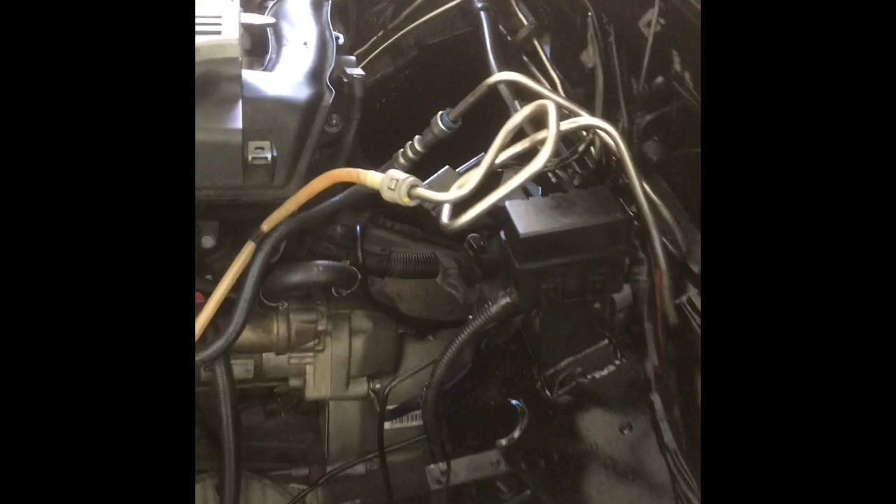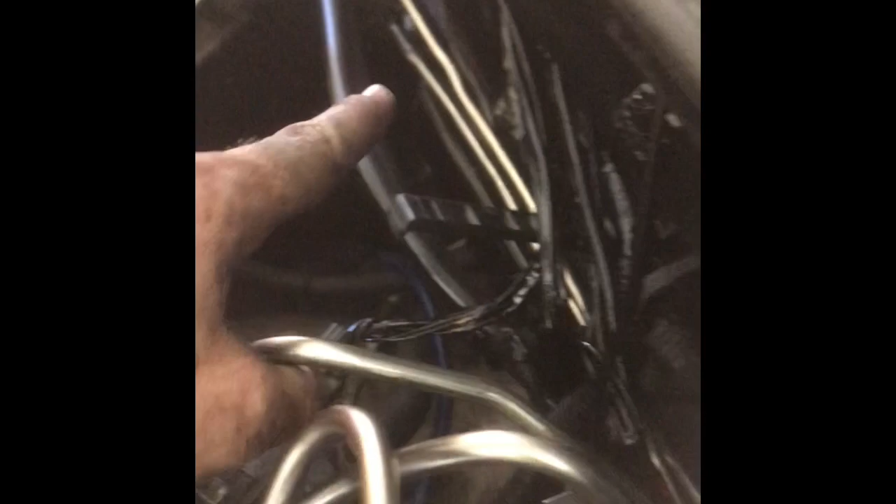So these are just rough at the minute, but use the steel lines just for the cooling capacity on them. Just a couple of lines run over the top, bend them into shape. Obviously you've got to get some hold down clips for them to run across the bulkhead here. Runs down the other side and then underneath the car.

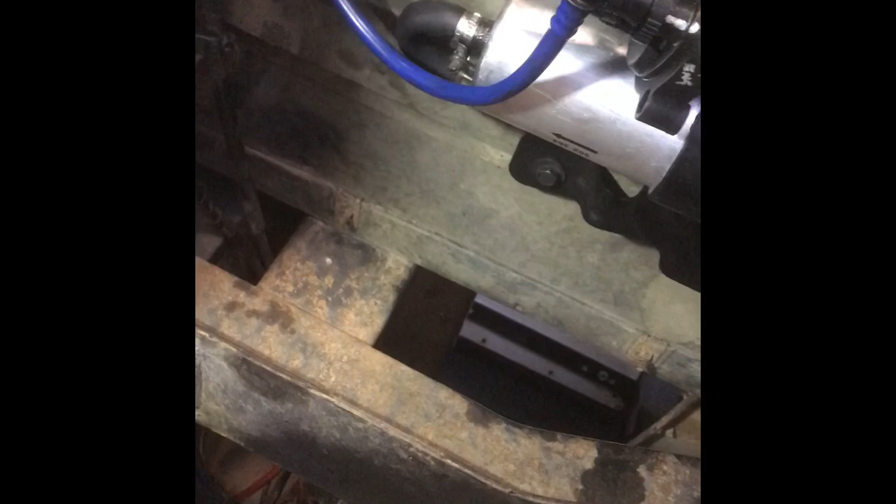Like I said, use the full system. Just welded a bracket to the cross member there, believe it or not. The supply to the engine, I've used all the X5 fuel lines all the way to the top, so that's great.

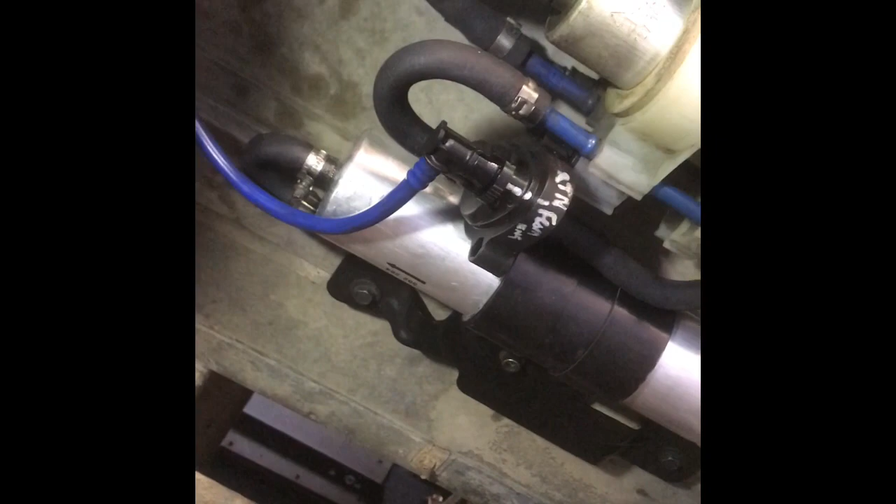The only thing I've got to do is make an extension from the return to the silver line at the front, and then a supply and return from the tank to these two. That comes from the lift pump from the tank, which I'm going to put in the tank later. That is the small lift pump then. So I'm just going to put that in the tank, wire that one up, and then that's it.

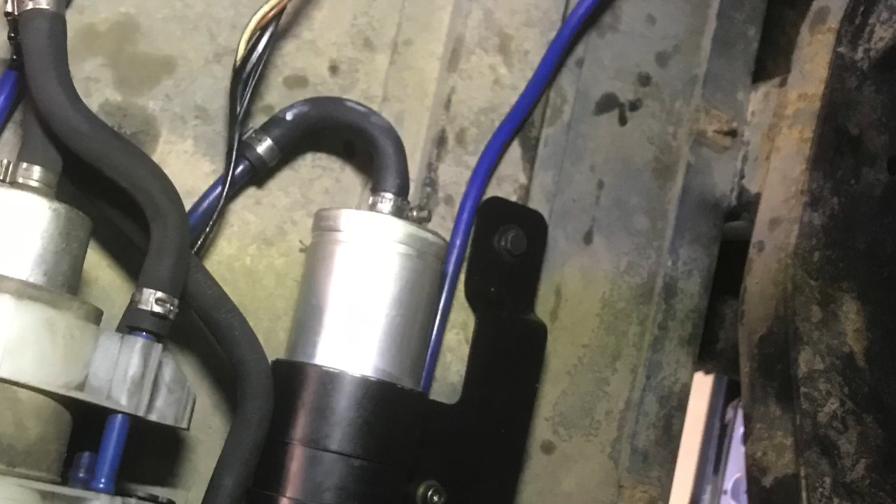The reason why I've mounted it where I've mounted it is because there's a lot going on there. The pump's quite big, I wanted to keep the inline filter as well, so basically I've bolted it up out of the way.

It's in between the chassis rail, sorry, it's up and away from the prop shaft. There's nothing really happening here, nothing going on, so I quite like where it's mounted.

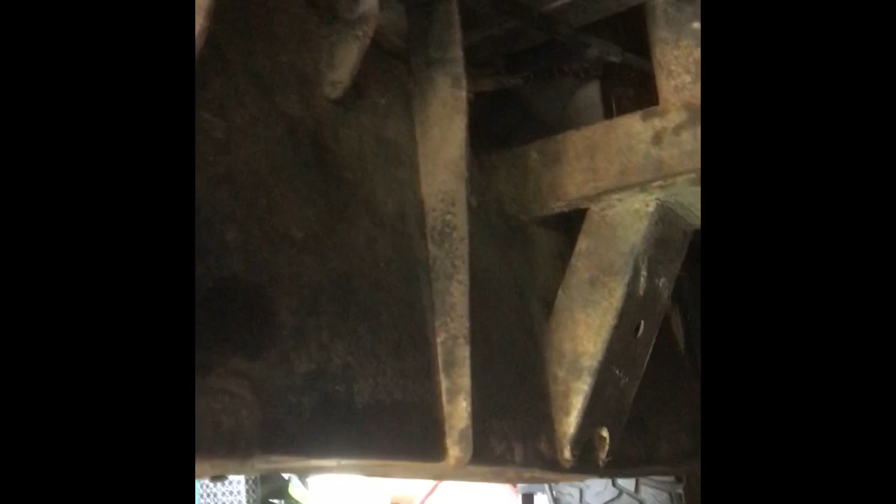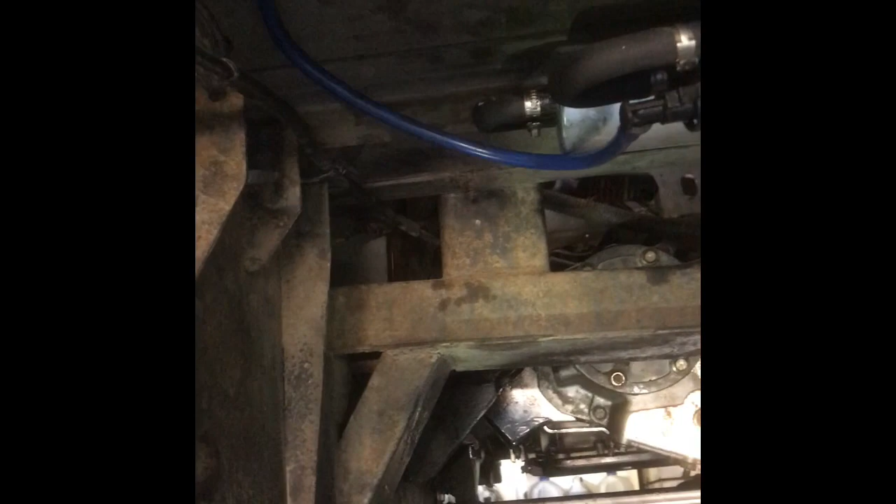I was going to mount it on the sides, but obviously I need the exhaust running up there, and on that side, yeah, it's a little bit tight. On the outside of the chassis rail, don't really want it there because there'll be rocks jumping about. So that's basically why I've mounted it where I've mounted it. Not quite sure where everybody else is putting them, but that was good for me. We'll see if it works or if it doesn't.

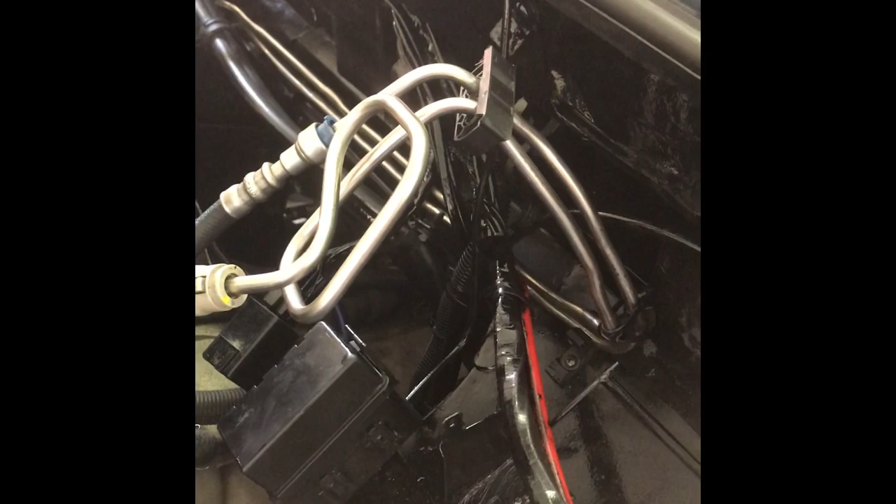Cooler lines, managed to keep them all over the bulkhead, just using all the main clamps which came with it. Screwed one into the bulkhead here, so everything's solid, it's not going to rattle.

These lines all solid across the top. I've had to straighten them all and bend them all different directions, that's why they look a little bit wonky. It wasn't new steel.

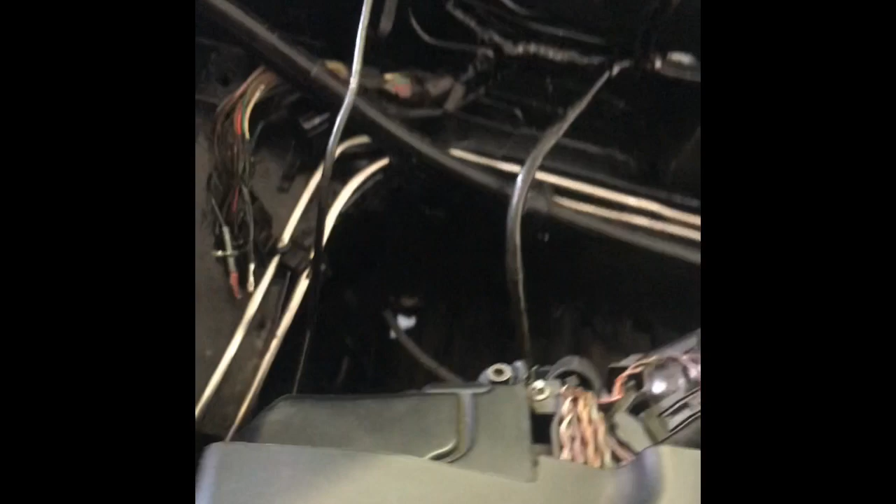Coming around to the other side, same thing again. Just fixed it to the bulkhead, and then run them down underneath, and then basically run them along the chassis.

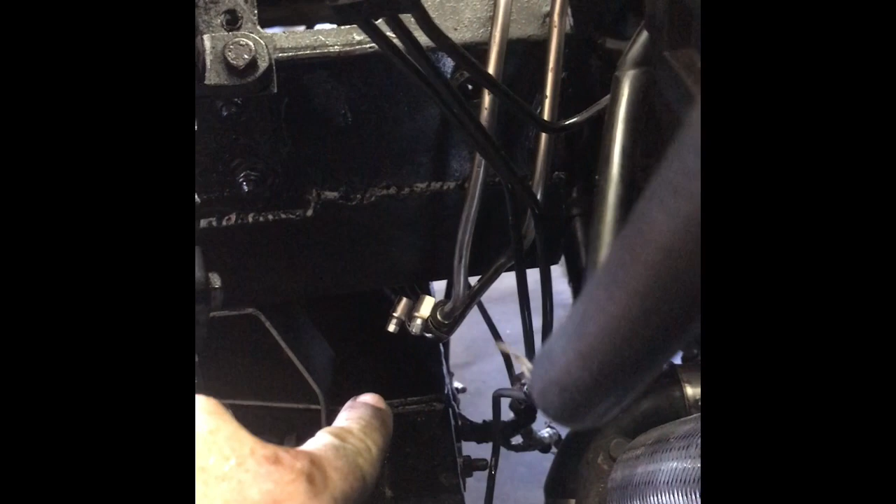I've kept a little bit of the Defender fuel line going down the chassis to the pump. I'll show you underneath.

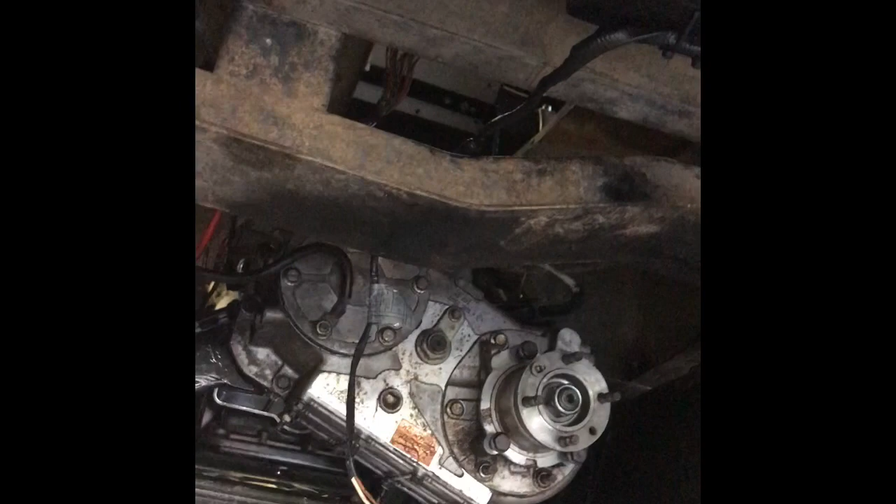So underneath, here we go. You can see that's where the transfer case ends, and that's where the back end hasn't been reconditioned yet, but that's how far up we are.

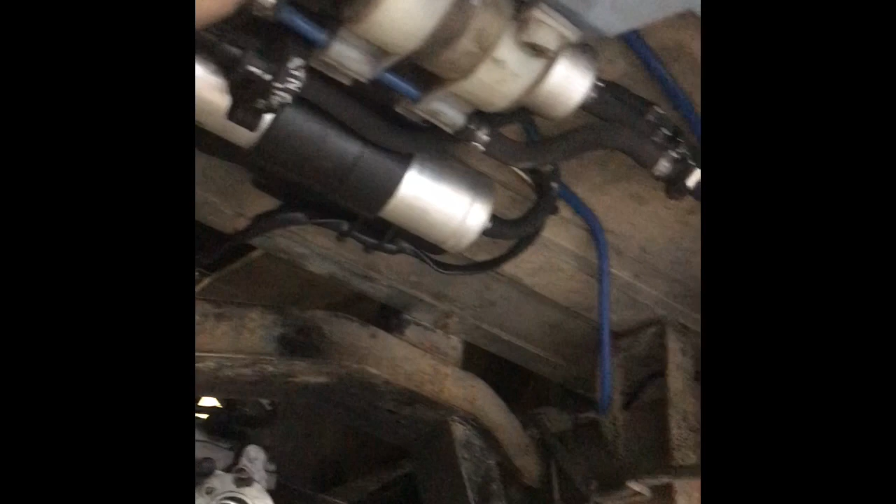Just welded a plate on there, mounted the pump. There's the pump, and then there's the fuel filter, the inline filter, and then all the stock lines then.

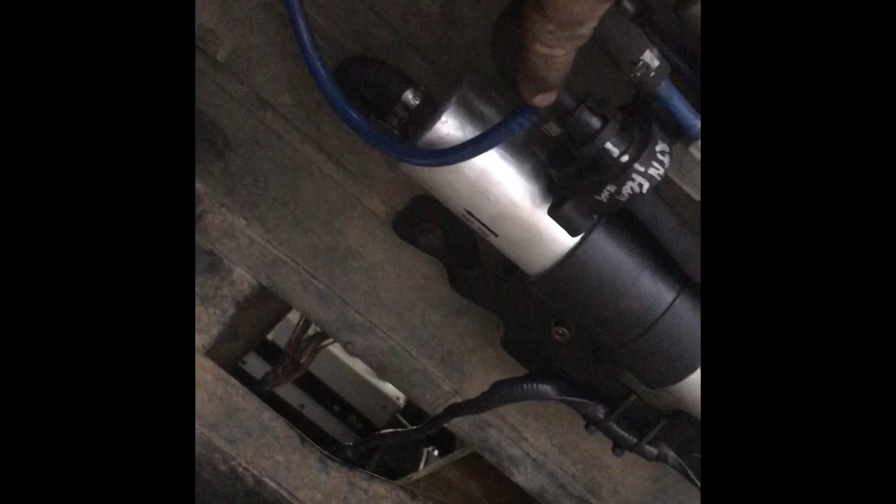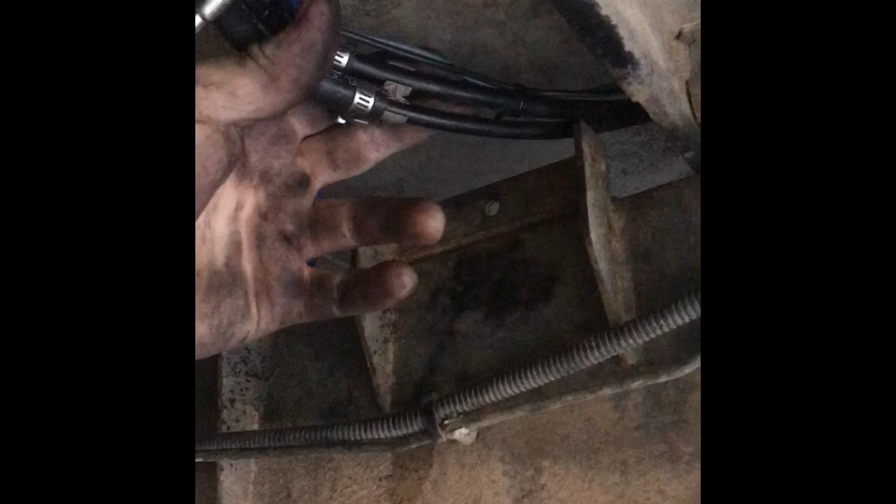So you've got the return from the engine, and then the feed to the engine is up there, that one there, and then run all the fuel lines down the chassis. And then these two lines here, these two plastic lines, they are the Defender lines to the tank, so I just left them in because they were quite neat.

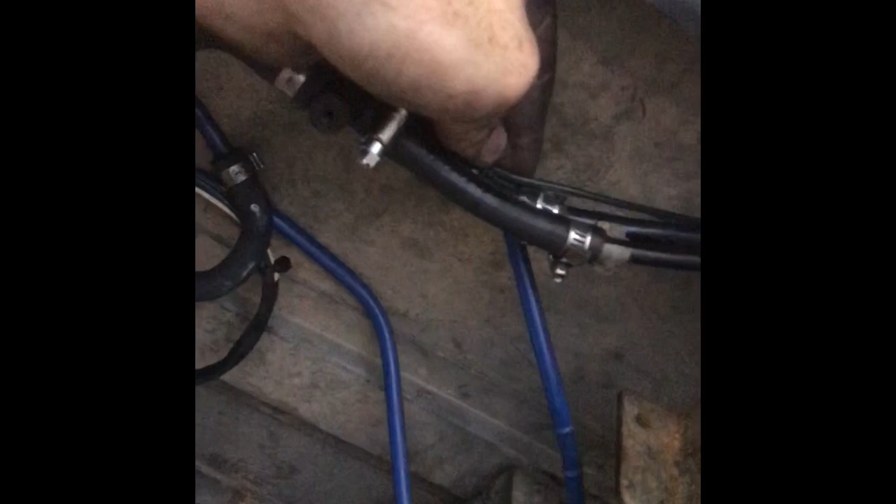And then I've put my own pump in the tank, which I'll add the video in a minute. I put the pump in the tank, and then these are the two wires coming from the tank. So I've basically followed the fuel lines down, and then there's the wiring loom to the high pressure pump.

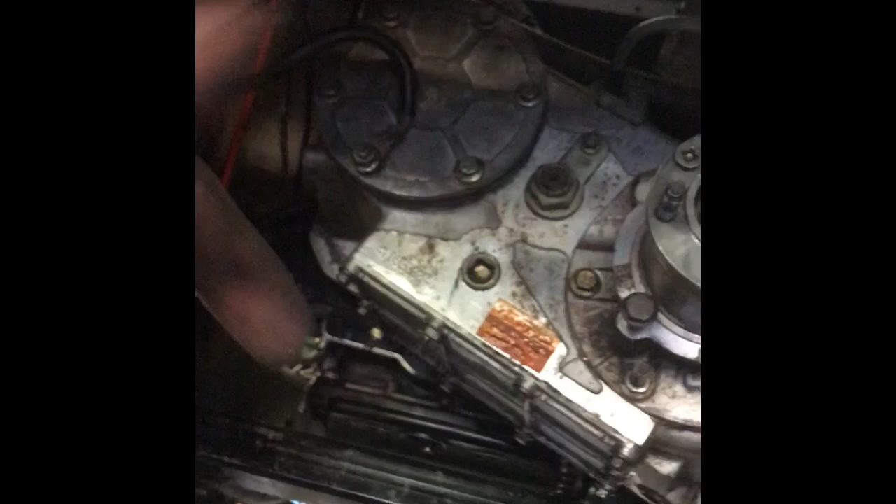That's the Facet pump there, and the wires run all the way down to the main plug, and then this will come off your relay. So you'll have an ECU signal in the relay, and the relay will feed the pump. With two pumps, I've teed into this line, so about halfway down here I've soldered in the second pump wire. The wires are really thick, so there's no problem, it'll hold the amperage of both pumps easy.

Yeah, that's about it with the fuel system. I can show you it working, but I don't know if you're going to hear it. Basically, where are we? No, I'm not going to be able to do it.

When you first start it, that'll probably prime, and then switch off until you start the car, and then the pump starts up again. That's pretty much it. Quite neat and tidy up there, way out of the way of any prop shaft - there's the bottom of the chassis, and then you keep looking up, and there it is, tucked away nice and tidy. Happy days.

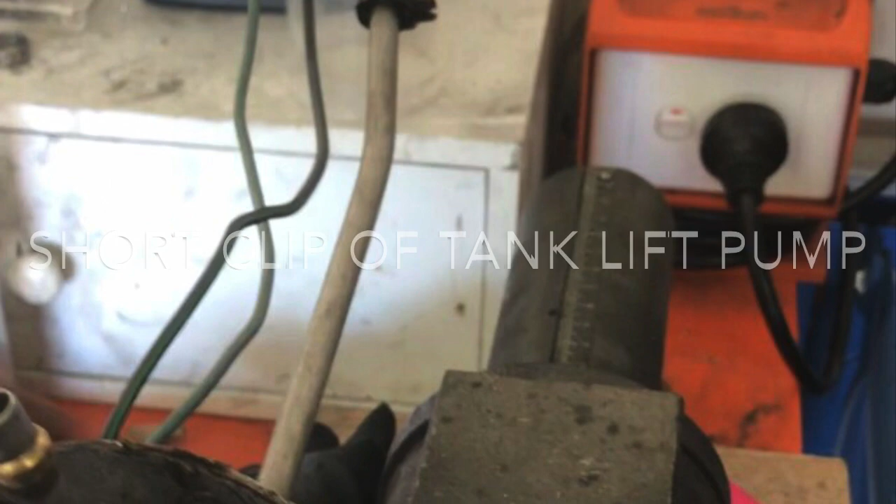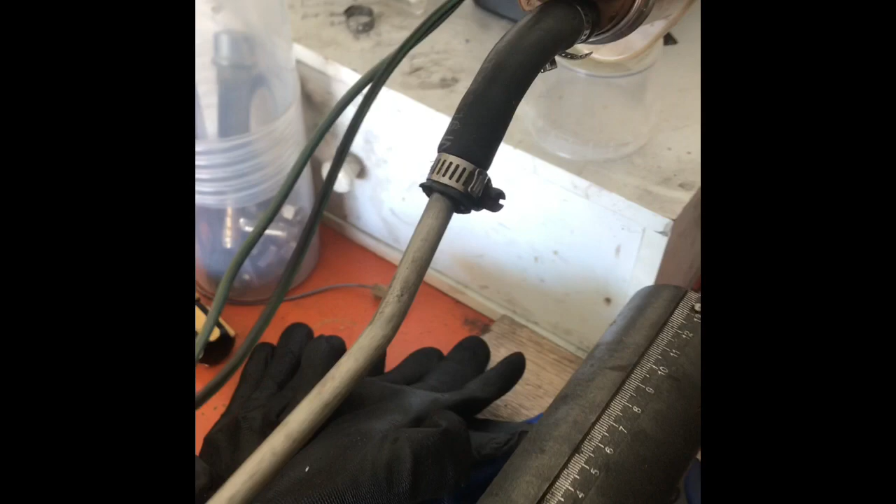Just a quick one on the lift pump up to the fuel tank. Basically taking off the Land Rover delivery top for the pipe, taking off the Land Rover part, which is just a strainer on the bottom, and then attaching the BMW lift pump, running two wires through a fuel resistant grommet, just run the two wires straight through it.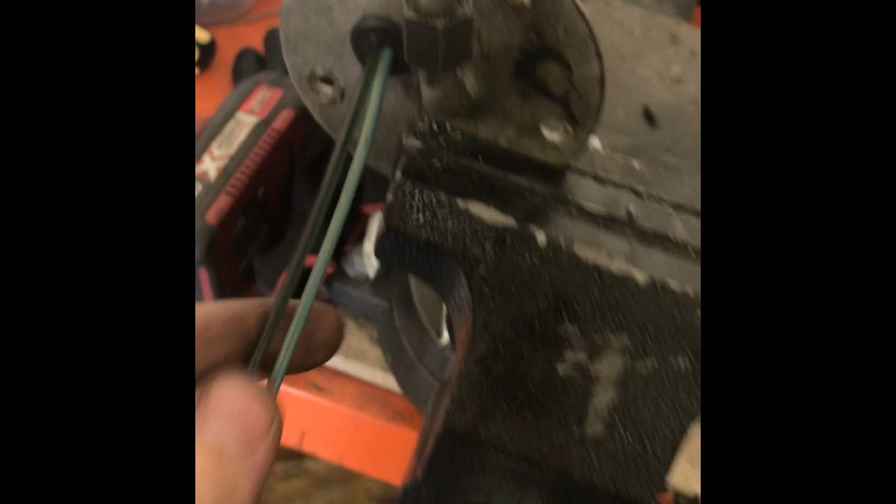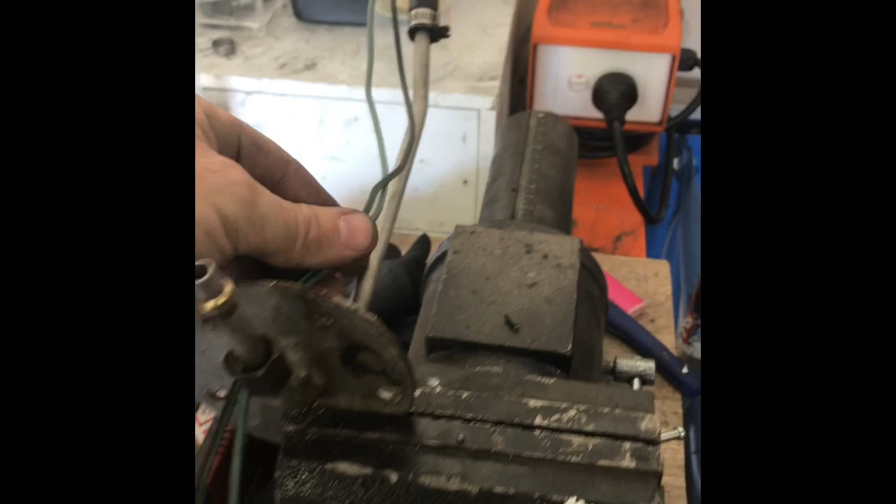That's not going to be the final one, but this is what I'm doing just to mock it up for a minute. Just run the wires straight through, and that'll go up to the fuel pump relay. So that's the gist of that for the lift pump. Because the 300 TDI didn't come with a lift pump off the engine, so this is the BMW one.

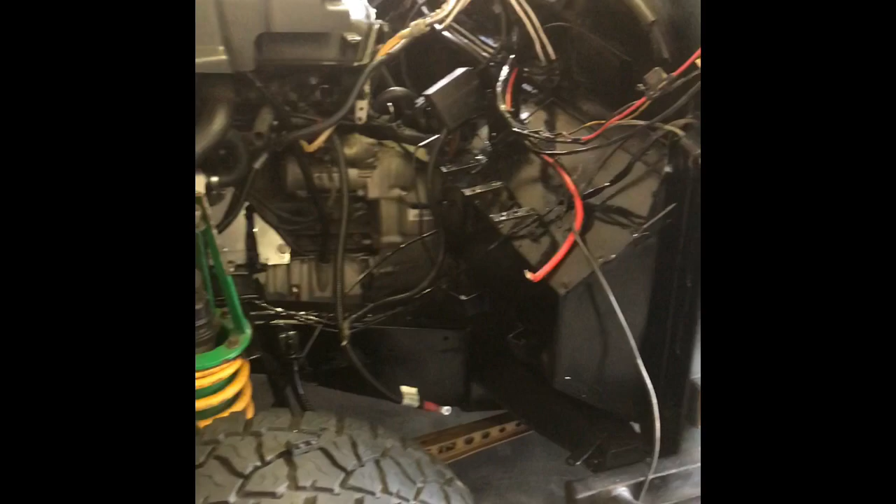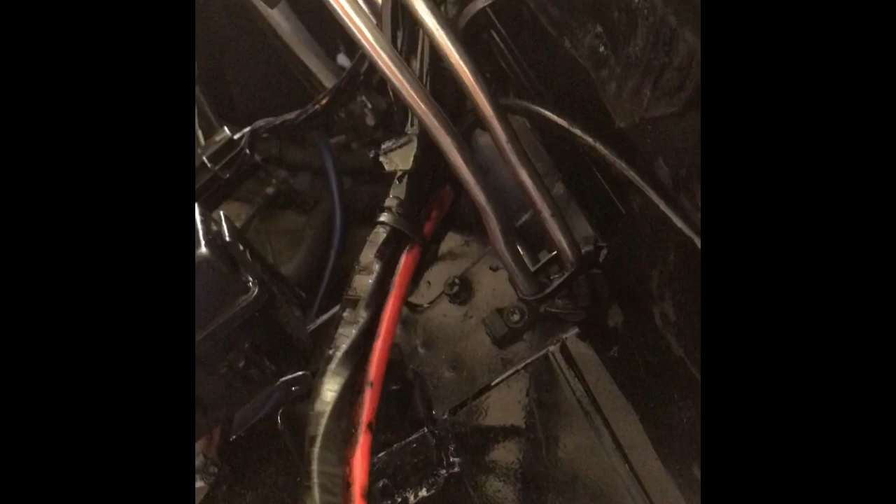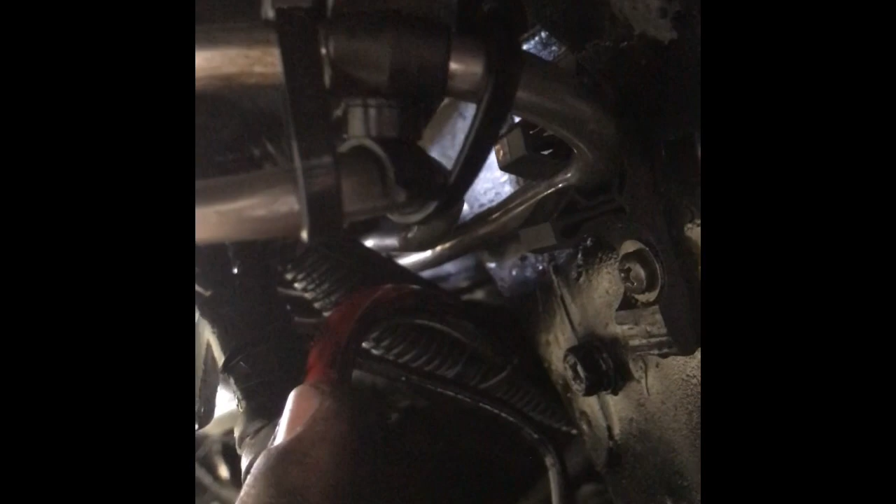Yeah, that's the basic fuel system. I think it looks pretty neat and tidy. It's going to work, it's not rattling about the place, there's nothing rubbing. Just got to be careful there's not going to be chafing on anything, but that's what I tried to make sure. I use plenty of spacers, there's spacers all over it, I don't know if you can see. I cable tied them so they're not going to pop off, but I don't think that's going anywhere.

And that's the fuel system pretty much done.

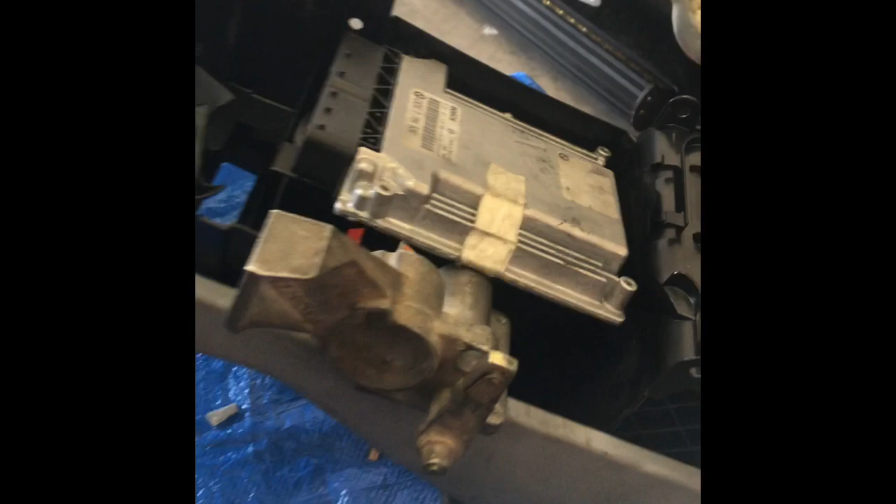That's going to be the center console on one of the next videos. I'm going to mount the ECU and mount the shifter where the handbrake lever goes, and then wire it up - there's the harness. It looks a bit messy, but it's all in order.

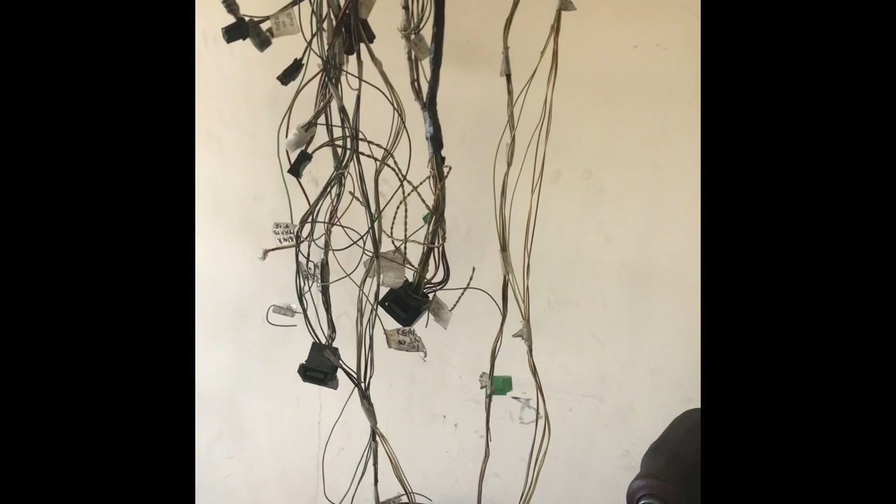That's going to be the harness, and that's going to be sending the signal to the fuel pump. I think there's - where are we? Yeah, one wire off there for the fuel pump signal, so that'll go to your relay, which I've got to get. I'll probably use one of the old ones.

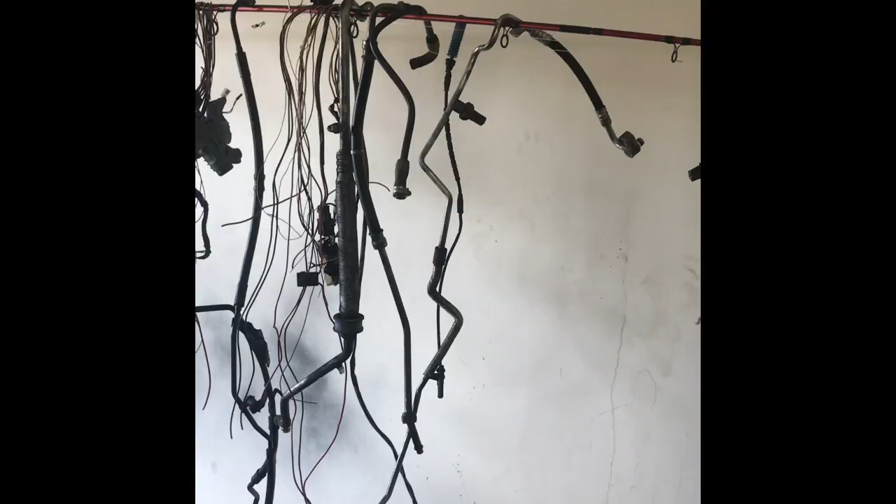Forgot to mention, if you need to organise all your stuff for a conversion, you need a fishing rod, pretty much hanging off a wire. Otherwise you'll never get organised, you have to have a fishing rod. Because, yeah, you can't use anything else to organise your stuff - it's got to be a fishing rod, and it's got to be a pen.

Yeah, so hope you know I'm kidding, but that's going to be the next video anyway. Happy days.

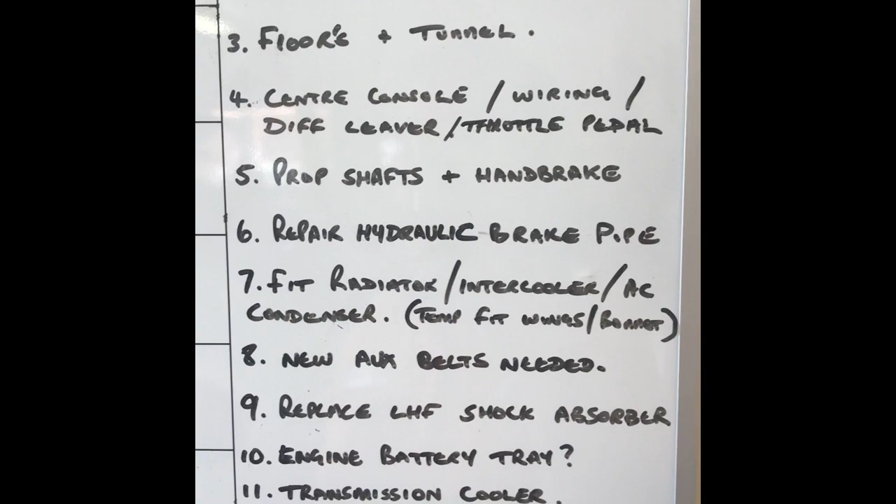Center console, that's that thing there. Finish all that off and do all the wiring, I'm integrating all the wiring into the console. So, a couple of other jobs anyway.

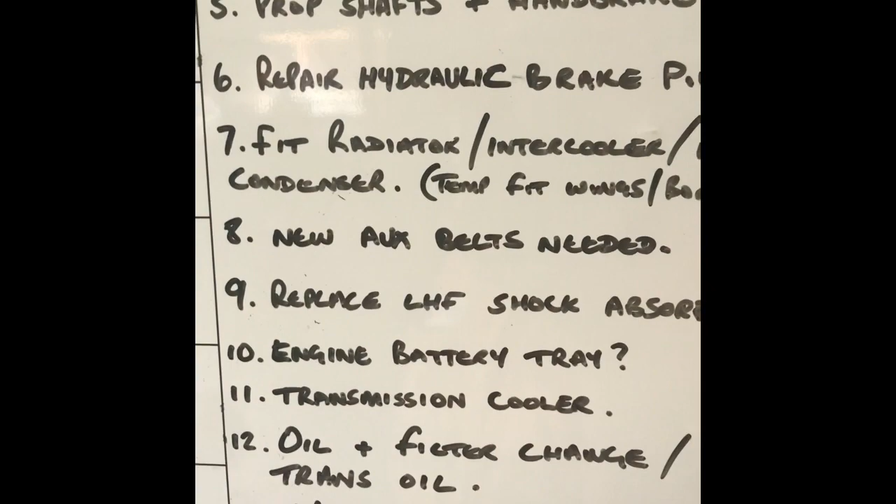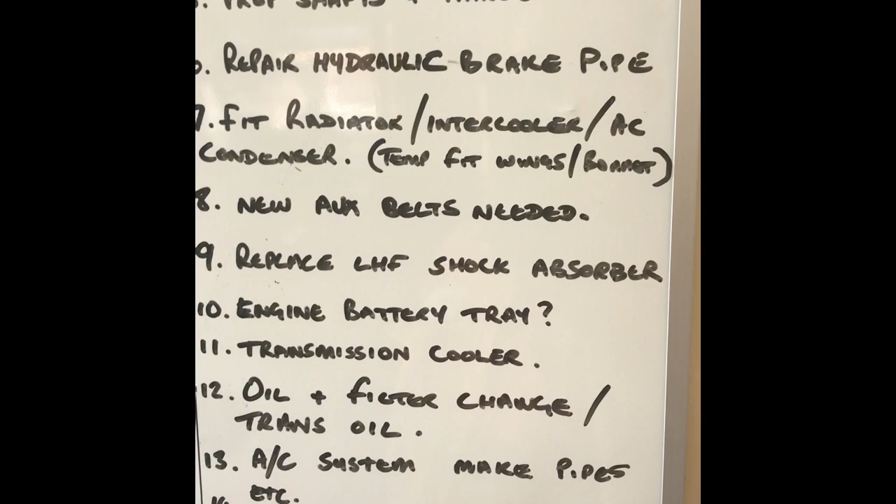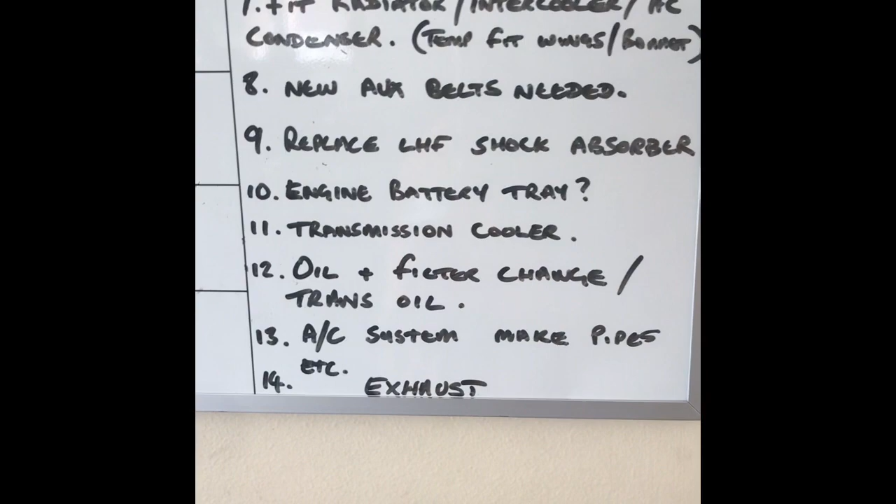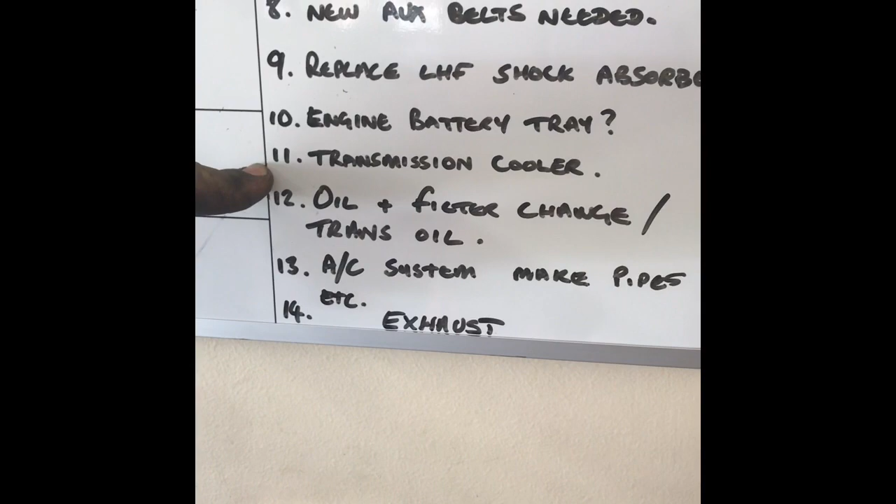Auxiliary belts, just like service stuff then. Shock absorber, battery tray, trans cooler - I'm going to try and get an air cooled cooler. I don't really like liquid cool coolers, just in case later on down the line if they split and wreck your trans.

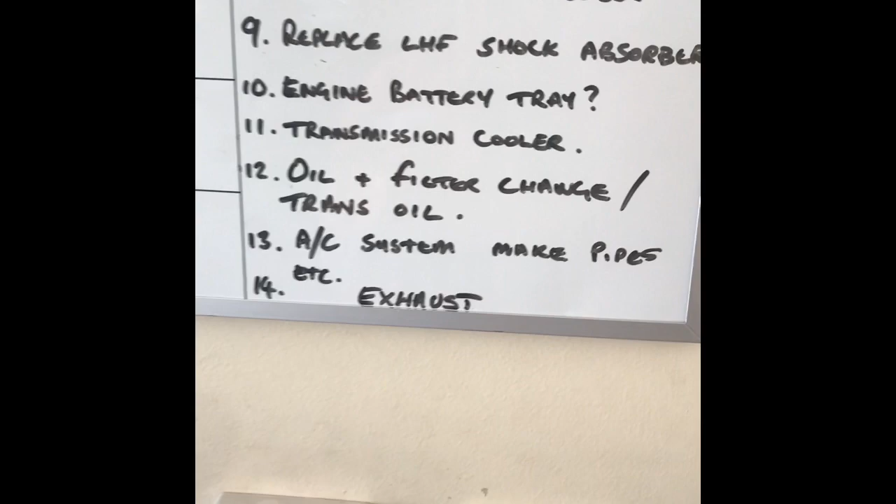Just noticed, did you hear that bird all the way through the video? Didn't even notice while I was doing it because I was hoping it weren't going to go fuzzy again. My camera finally starts working and then that bird just ruins the video. But yeah, I'm not doing it again, so just going to have to put up with that stupid bird screaming in the background.